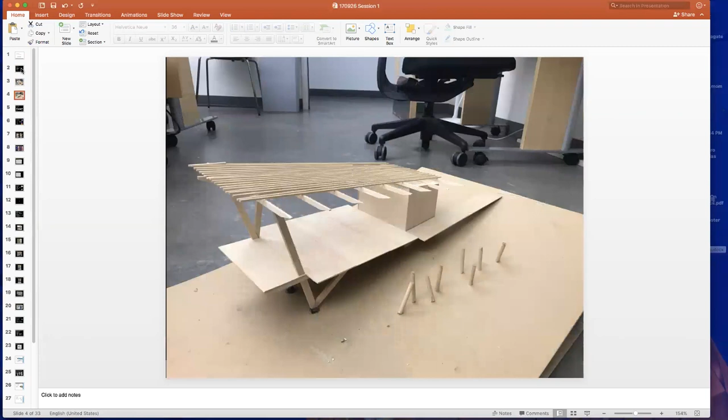But physical models did have an advantage in that they worked in 3D - you couldn't hide a whole lot in a physical model because you can look around and see if things really do work one way or the other. As we moved along, there's our beautiful physical model, a nice 3D view of it from different sides. That actually worked out pretty well.

Now, because of the limitations of physical models, in Renaissance times they came up with this brilliant idea that rather than using physical models as the primary way of communicating, we could come up with a way of drawing what the model is and representing it - taking a 3D object and finding a way to represent it in 2D. The architect would create this representation in 2D, then the people who are going to build the thing have to interpret that and figure out what they actually meant.

Inherent in that is this challenge: we have to come up with a common language, and I have to do a good job converting it into 2D in a way that you're going to understand on the other end. Because either way, if I don't accurately put it into 2D or you don't accurately interpret my 2D, we could be in trouble in terms of accurately communicating what's going on. That was really the challenge - it was a great efficiency in terms of what we were doing, however there was room for error because there were two interpretations: me getting it into the form that looked like a 3D model, and you being able to reinterpret it.

But we came up with a whole system of working with these - the idea of orthographic projections. If you wanted to do a plan view, you'd just look straight down at it and draw what you see there. If you want to do an elevation view, you'd look at it from the side, like this or like this. So we project it, kind of a 90-degree projection, and draw the lines of what you see. They also have the whole notion of 3D views.

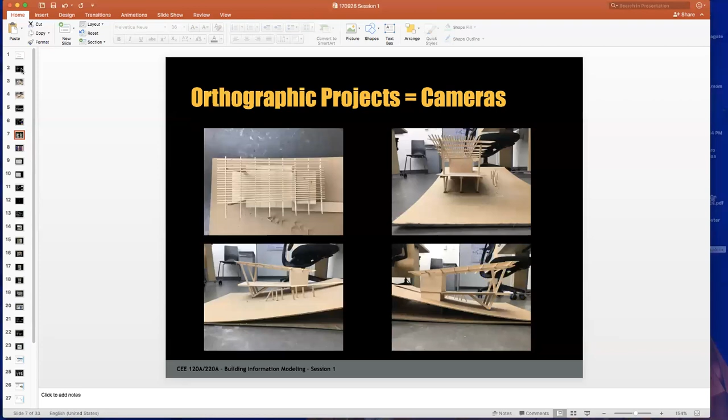3D views are available, but has anyone done any 3D drawing? It's a little work to go through and come up with axonometrics, isometrics, and different perspective views. But really the idea is if you think about orthographic projections as just being cameras on the model, that'll serve you well when we talk about building modeling. That's fundamentally the principle of how we create different views in building modeling tools: instead of a physical model, we have a digital model, and we're manipulating cameras around that object instead of creating a series of separate drawings. That has a lot of advantages.

Just to help you out, to give you some sense of perspective, I love to do this because I still have access to these things.

These are blueprints. If you ever wondered why blueprints are called blueprints, this is why. They are ink drawn on linen, and that linen was laid over a surface where they could project light through it. Where the ink blocked it, you got white lines, and everything else turned blue. That's why you have blueprints.

These are from the 1920s, for a little house that I remodeled many years later. I can pass these around for people to take a look at. What I want you to notice about these, send those around a little bit.

These are some elevation views you can take a look at. This is a floor plan view. Notice there's actually two sheets of paper, one a copy of the other. Send those toward the back. That is the entire body of information you're going to build the house with. Just that. Okay, go to it.

I got some nice pictures. I got a floor plan. You're going to go ahead and figure it all out. And strangely, that actually worked.

Because if you had very good craftsmen who were experienced at interpreting all this information, they could go through and figure it out, and they'd do a good job for you. So when they see these Spanish details and it says a wrought iron kind of window cover, they create something nice that looks like that. However, you're depending an awful lot on your craftsmen to do really good work because you really haven't given them very much to operate with.

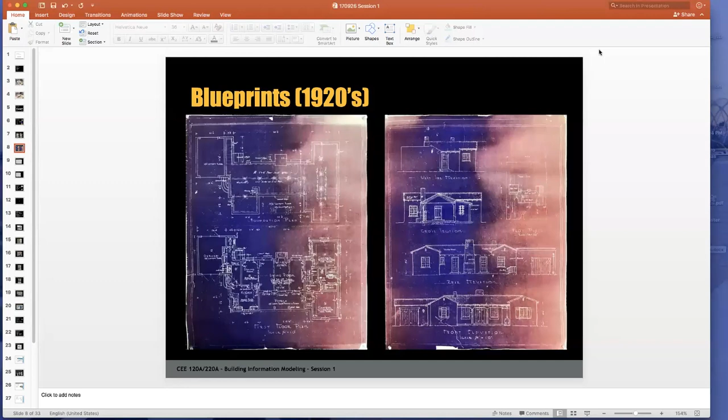Now, a little bit later in time, take you to the 1960s. People started doing hand drafting. Here's a nice little ranch house. This probably looks like a lot of the houses that you may have grown up in, or your parents grew up in.

You can sort of see in this drawing, I'm just going to leave that for you there and send it on back. We have some nice elevations, the front of the house. We have a plan view. We even have a little construction detail there, kind of showing how it's going to be built. Super.

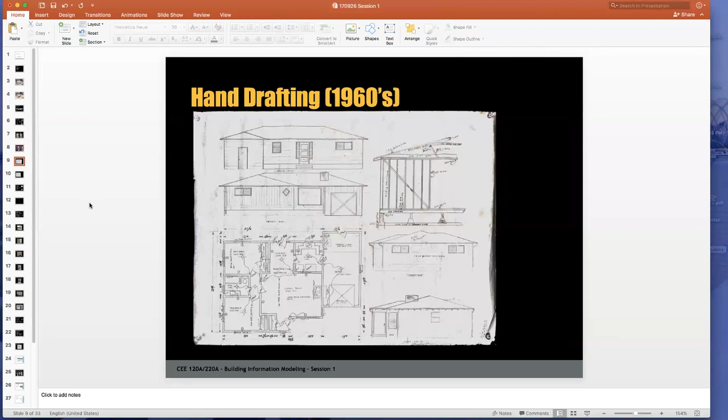And then, if I move forward, there's a site view. This little block of information over here is the construction specification, which is sort of the contract, basically, that says what the builder is going to build for you in exchange for what you're going to pay them.

So it says, for example, for lighting fixtures, we're going to allow about $50 per lighting fixture. Talks a little about paint grade on some of the cabinetry and stuff like that. But this was it — these two pieces of paper were the complete agreement with the builder. It's just an incredible amount of information.

If you've seen the set of documents for almost any modern building, like the Y2E2 building where we are here, it's like a phone book. It really just looks like thousands of pages of information that has to all be cross-coordinated to make sure everything is in complete sync with each other. Anything with thousands of pages and several thousand drawings inherently has the opportunity for some miscommunication or lack of coordination.

Just to give you a sense of perspective, I brought in some plans for a couple of houses. Houses aren't nearly as bad as some of the big buildings in terms of what's required. However, even this, back around 2000, you can see there's about 30 sheets here of information, everything from the architectural sheets through all the structures and construction details. There's just an incredible amount of information here to be coordinated.

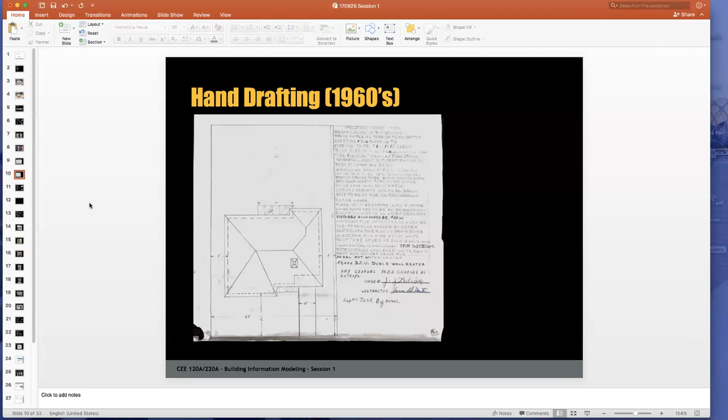There's a couple different sets up here. If anyone wants to actually look at them in any detail, they're out there on Canvas. So let me just point you to where they are there for you.

Let me go back out to files. But these are all just projects we've been working on. So if I go out there, okay, the Powell CDs or the Graves CDs, you can take a look at those. So let me open up the Graves CDs, for example.

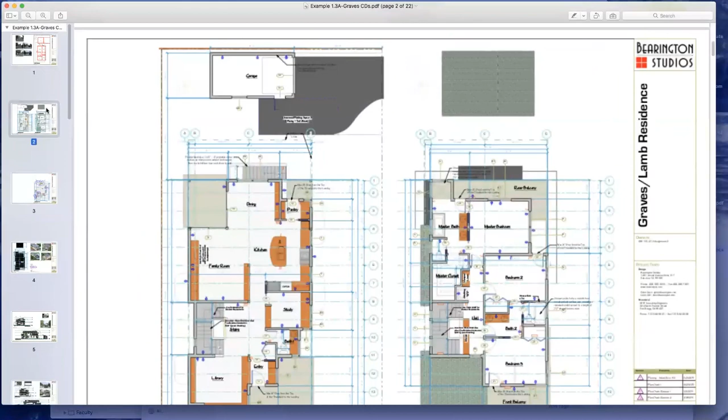This is for a pretty simple house here in Palo Alto. Let me see if I can pop it around. There's 22 sheets in this one. A little house that got replaced, a little bit of a demo plan. That's pretty easy, you start getting into construction, just floor plans. We have roof plans. As part of the whole building modeling process, we can actually start to include 3D models.

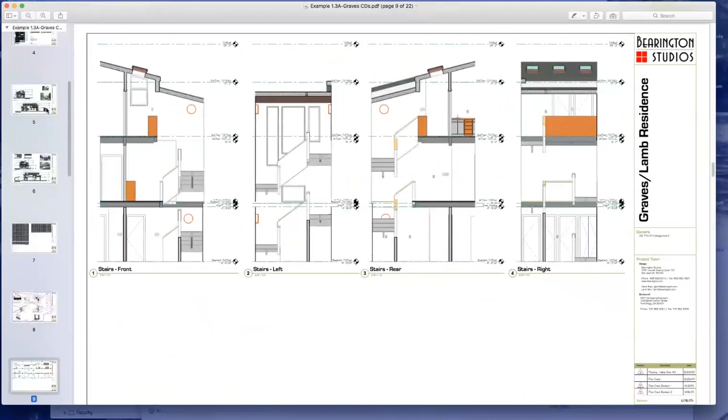That actually starts to make a difference in terms of people's understanding of what's going on. Okay, lots and lots of information in here. Sections through it all, construction details. There's just an awful lot of information that goes into any building set right now. Those are out there for you to take a look at if you want to. The point of all this is that really what's happening is if we have these architectural drawings serving as the basis of communication between the designers, the owners, the builders, and everyone who has to approve it, you start getting an incredible amount of information loaded onto those sheets because those sheets are trying to serve a lot of purposes. And the problem with that is you don't always have consistency. It sometimes gets a little bit hard to figure out exactly what's going on.

So to demonstrate this, I'm going to open up Revit, and we're going to get a volunteer from our crowd right now who is a good interpreter of 2D drawings. Okay, here's our little mystery house here. A lot of you have probably seen a house that looks something like this. So if I give you a drawing that looks like that, we're going to test how well you can draw what that looks like in 3D. Does that make sense?

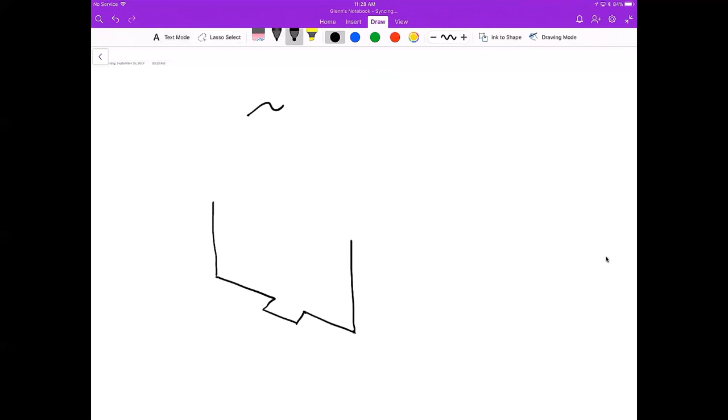Okay, now to test this, our gracious volunteer here, see if I can do this over here. Mr. Volunteer, we've practiced none of this. Go ahead and draw me in 3D what you think that house looks like. Notwithstanding any lines that weren't shown. That's the point of it, exactly. Is there an erase function on this thing? Yeah, hit the little, it's up there. Very good. It's got a fine hand, doing very well there. That's okay. It'll prove the point nonetheless. And if you want to laugh at his drawing, you can try this next, because drawing in 3D is actually kind of hard. This is without a ruler, so.

Yeah, I'm applauding you, I think it's actually looking pretty good. I'm not talking to you, I'm talking to them. You're fine. That's good, doing very good at drawing in 3D. A lot of people have trouble with this. It's funny, I do this with clients all the time. You show them 2D things and you want them to interpret in 3D. It's actually very hard for them. People swear they will understand something based on the 2D representation, but they really don't always. So that's a big advantage of 3D modeling. Okay, I think you're pretty good. Oh, now you're going for extra credit. No, it's okay, you're fine.

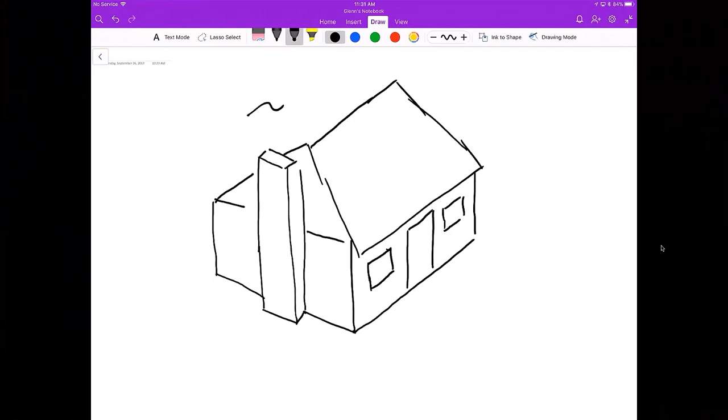That's the south side. Oh, so here's the north side, that's the other side of the house. Okay, so there's a wing I'm missing. Well, go ahead and try and sketch it in quickly, what do you sort of think? Okay, you got that little wing on the back? It's okay, yours is on the other side of the house, but that's okay. Yep, sure did, all right. That's okay, leave it there. That's fine, what's going on?

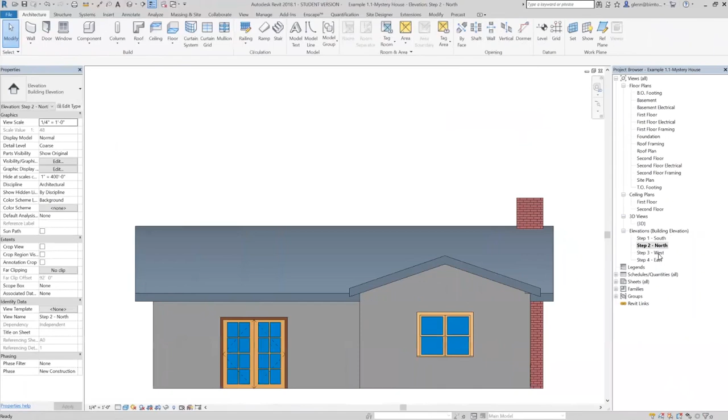Okay, so at this point, how many people feel like you have a pretty good understanding of what the house is? Would you be willing to bet some money on it? No, not quite yet. Oh, okay, so we might need to give Brad a little more information here. That's the west side elevation.

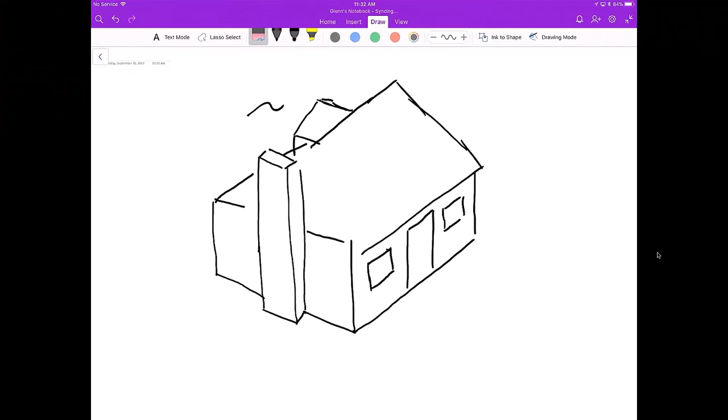Erase my things on the wrong side. Oh, that's okay. I really wish I could draw this now. All right.

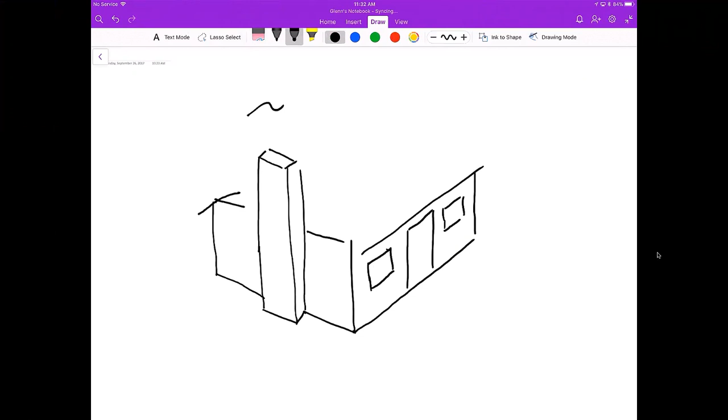He's discovered there's a barrel vault roof across this thing. Didn't see that one coming, did you? Well, there's no detail calling it out. Exactly, that's exactly the point.

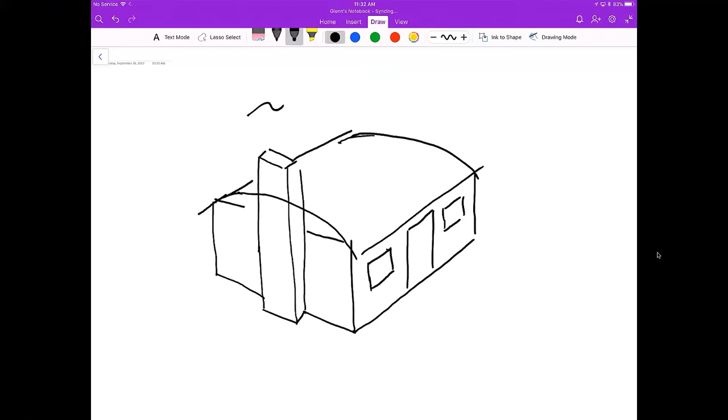The architect's going to send him one more drawing just to really frustrate him. This is the other side of the house. The way that's shaded looks like that's on a curve. His discerning eye has noticed that, boy, that's not just 5 pieces of glass that are perfectly flat. That little bit of shading, don't worry about it at this point.

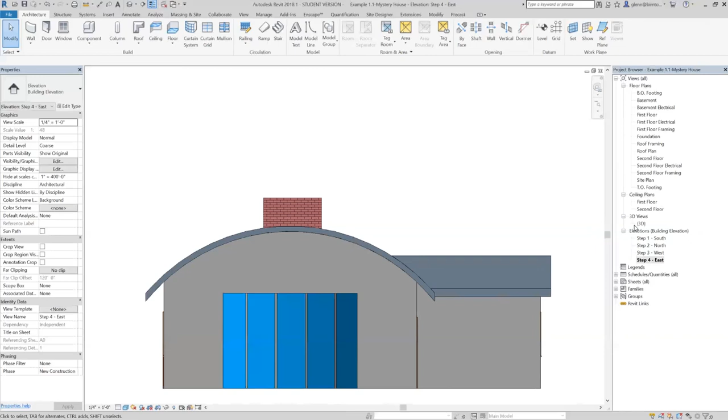But basically the point of all this is, if I give you 1 or 2 views, you may think you understand it, but you may not. It's really, really hard by giving you just a few views. And even in those thousands of sheets that came for describing the Y2E2 building, you still may not completely understand it, because you understand what you see, but you don't understand what you can't see, and maybe it doesn't all resolve so well. So the point is, the only way that you can really start to understand it is to actually start to get to a 3D model. A 3D model that we can all move around, that we can start to experience.

That's why we're going to be building 3D models. It's really just to clear up that ambiguity, because with a single 3D model, anything we do anywhere is going to be reflected in all the views, and it's just going to stay internally consistent. We'll show you an example of that in a minute.

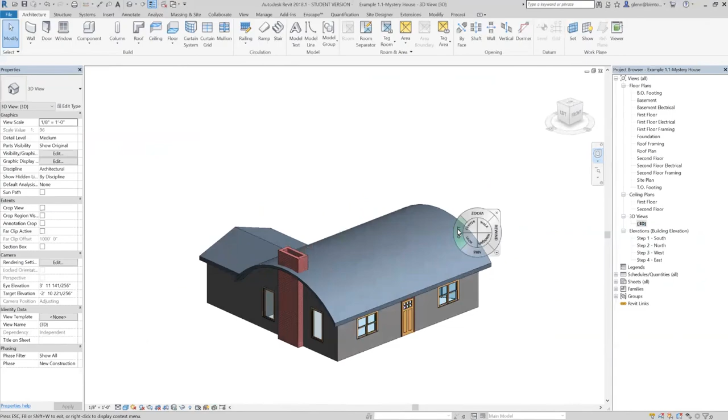We got these drawings. It's hard to share a single design vision. In the world of computer-aided drafting, which was the first step towards improving our efficiency, when we wanted to stop drawing things on paper like that, we came up with computer-aided drafting systems.

And they had a big advantage as opposed to drawing it on paper. You saw that paper going around, it's kind of fragile. If you have to erase things, things get in trouble. Computer-aided drafting was really all about efficiency. Like most things on the computer, if I could copy and paste them, I can just really quickly duplicate different things. That's what it was all about. It was about making our drawing very, very quick.

The only limitation, though, is that although we were doing it quickly, they were still just lines. They didn't really understand what lines meant. The lines were just lines. We really didn't carry any intelligence. And because of that, you ended up with all sorts of problems like this.

So I love these pictures. This is what happens if you pay attention to the lines on paper, but you don't actually apply some common sense. That's an example of a driveway that might be a little bit hard to get up during the snowy times.

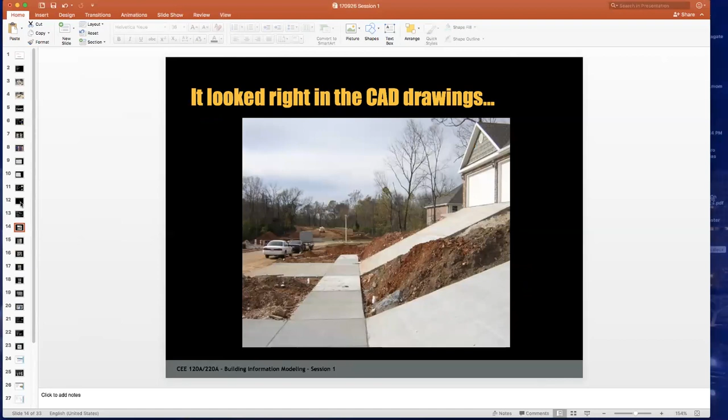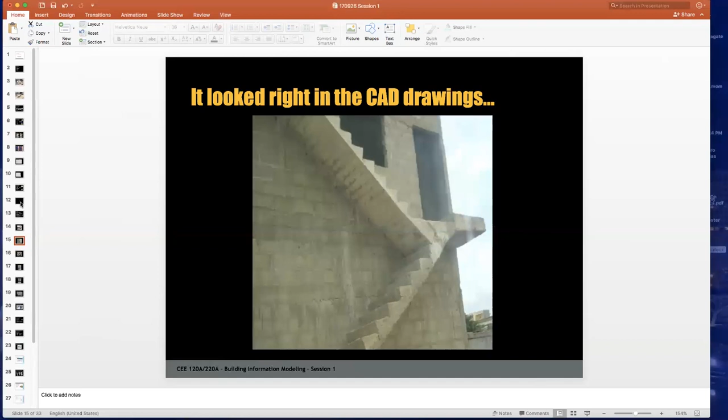This is a classic too. Stairways, you're going to find out, are very hard to draw accurately. So it's quite possible to end up with situations like this, which are a little bit hard to get from floor to floor.

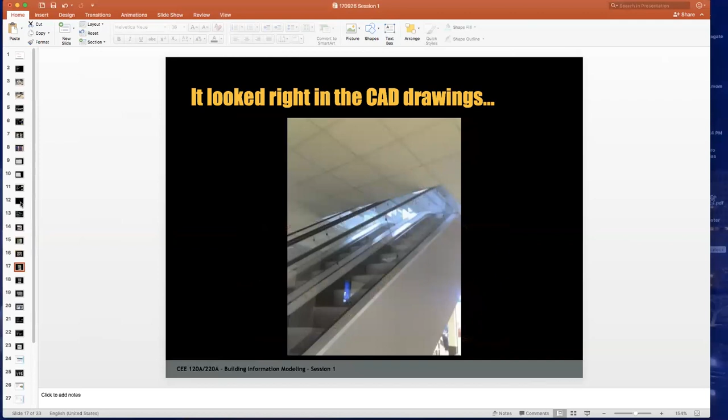How do you do this? You do this because someone went ahead and did the plans, they did the elevations, but they didn't actually have the site plan in mind at the same time. So you end up with this, and the silly thing is things like this actually get built.